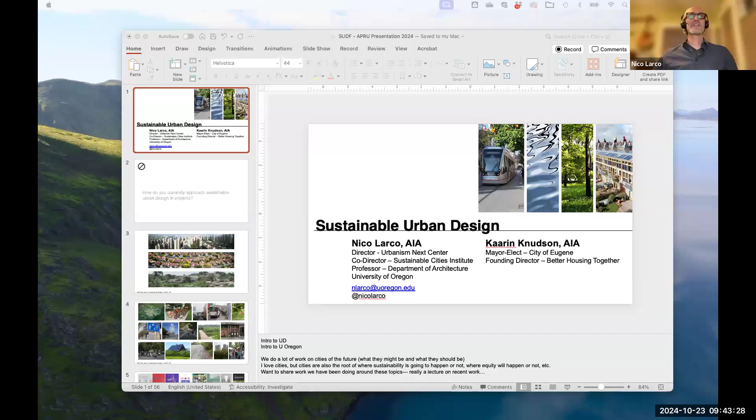Thank you so much, Paola. I can't even tell you how happy it makes me to hear that you're using this and that it's helpful to the work you're doing, after 10 years of working on this project. It is very exciting to see that it's useful to people. I'm thrilled, absolutely thrilled. And thank you, Kaarin, for the introduction as well, and for the invitation to be here. We're both very excited to share a little bit of the thinking and the work we've been doing on the Sustainable Urban Design Framework and Handbook.

As mentioned, I'm Nico Larco. I'm the director of the Urbanism Next Center, co-director of SCI, and professor here in the Department of Architecture. And Kaarin is here as well—Kaarin, do you want to introduce yourself? Hi everyone, I will say more in a few moments, but also an architect and urban designer in practice for the past 20 years, and had the great fortune of working together on this research project with Nico for much of this past decade.

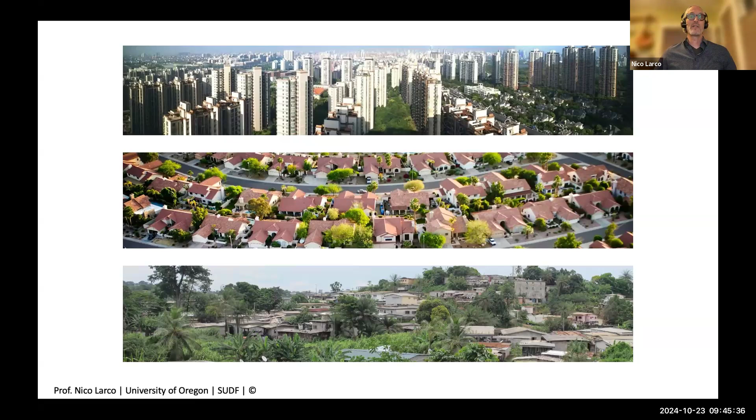One thing that's absolutely clear is that there's tremendously different contexts out there. These are images: the top one is Shanghai, the middle one is Arizona, and the bottom one is Libreville in Gabon. What's absolutely clear is that these all have really different conditions, very different demands. Climatically they're very different, culturally they're different. Politically, economically, there's a whole range of differences in what would make sustainability possible in one place or another, or what interest there might be in sustainability, and how to do it.

So it's really important for us to know what we should be focusing on. How do we compare and evaluate different schemes, for instance, or different areas? And how do we make sure we shed light on false claims? There's a lot of greenwashing that happens around here.

Turns out there's a ton of fantastic work in sustainability-related areas in urban design. What you notice at the outset is that it spans a lot of different disciplines that often have fantastic work, but also very siloed work—everything from transportation pieces to urban ecology, urban forestry, stormwater networks, how we understand parking, just a whole range of different pieces.

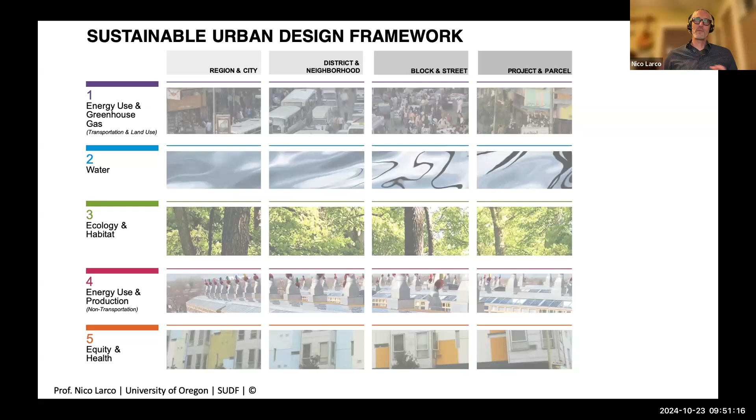But if you do this, you get a sense of overall this kind of matrix of outcome goals and scales we work on. And what we did here is then add specific urban design elements, physical things that you can do in the city that exist within these outcome goals and within these scales.

And Paola, that link I sent you, if you can put that in the chat, that will take you to a page which has, I think the first link there is the framework. So you can have a copy of this framework to help understand what we're doing here.

So what this does here, as I mentioned, these are all specific physical things that you can do in urban design. What this does is it lets you think about, for instance, I've got a project at this scale, these are all the questions that I should be asking about this project, right? In all these different areas, and thinking about how they might relate to each other, what trade-off there might be.

Or such. You can also think about, if I'm doing a project at this scale, doing an evaluation of what's happening at these other scales to figure out what things you might be able to work off of, you might need to mitigate, you might need to work with different stakeholders or different partners to help work on those things.

You can also use this to help understand if you want this outcome, if you really want to deal with stormwater issues, for instance, these are all the things that need to happen in the physical realm over all these scales to make that actually work.

So I often say this is like a magic decoder ring, this framework. So if you know, and typically, your clients, your community stakeholders, they understand what they want to get out of this, this helps them understand and helps you understand what physical things need to happen to get to that. So it's a way to help affect your design decisions, understand what kinds of things you need to take care of, and also help you understand or engage stakeholders around this.

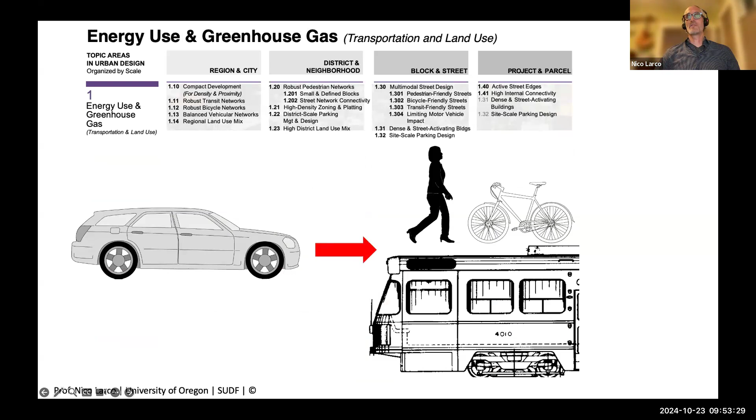So for energy use and greenhouse gas for transportation and land use, as I mentioned, this is really about how you get people out of cars and into bike, pedestrian, and transit options, which are much more sustainable, much more equitable modes, less energy intensive for what we're talking about in this category.

So at the highest scale, at the region and city scale, we're talking about things like compact development, making sure that you're building densely and not having a large metropolitan footprint.

So compact development is an important thing to be considering. I think Kaarin might be talking a little bit more about that later on.

Other things to think about at this scale are overall transit network. So our regional transit network, how does transit work all the way across this area? Our bicycle network - so these aren't necessarily what's happening on the street, but how the whole network works. And things like regional land use mix.

So understanding, thinking about ensuring that we don't have, for instance, all of residences in one part of our city, all of our businesses, all of our commerce in another part, and all of our industry in another part of the city, but making sure that that's mixed at a regional scale.

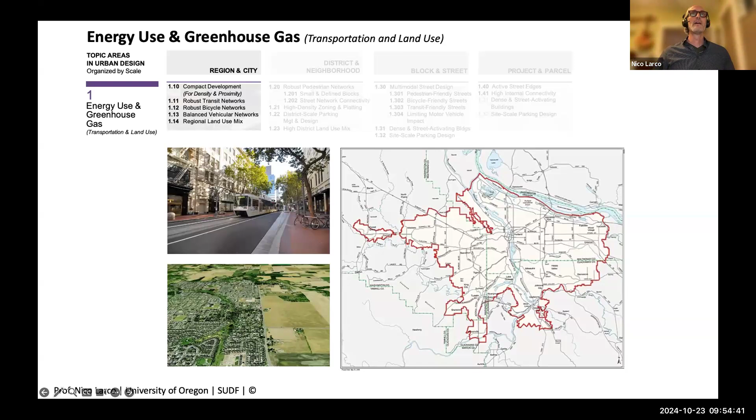At the district and neighborhood scale, there's a whole other set of things that we think about. So one of the big ones is this question of having a robust pedestrian network, making sure that you can easily walk from one place to another that has really good connectivity.

But in these kind of gridded developments, it's very easy to get from one place to another, right? If you're going from one place to another through a fairly straight line, from one place to another.

Which doubles or triples the distance that you would have to walk. So not having very good street connectivity creates increased distances, which leads us to do the obvious thing, which is you typically tell your child to get in the car and I'll take you there. So having more network connectivity helps us make a more pedestrian friendly area.

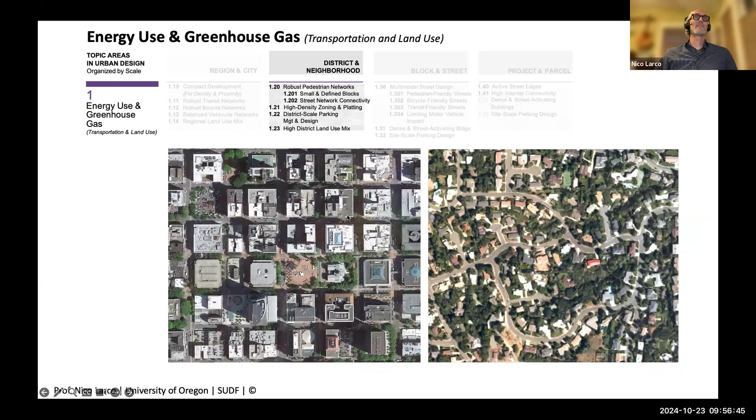Also at this scale, we're thinking about high district land use mix. So for instance, having what's often considered the 15 or 20 minute city, that in one area, instead of having single use where we see all that happening over here, we have a range of different uses that are all right next to each other, which makes walking and biking feasible within that distance.

At the block and street scale, we're really talking about what's called complete streets or multimodal street design. This is an image from NACTO. If you're not familiar with the Urban Street Design Guide, it is a fantastic resource from NACTO.

Their whole series of street design guides are fantastic. We worked with them on this research early on.

This shows a street that has, at the block and street scale, design that allows all the different uses. It has ample space and great amenities for pedestrians, for cyclists, designated lanes for transit, and it also allows the car, but it doesn't allow the car to dominate. So making sure that the streets allow all these different uses.

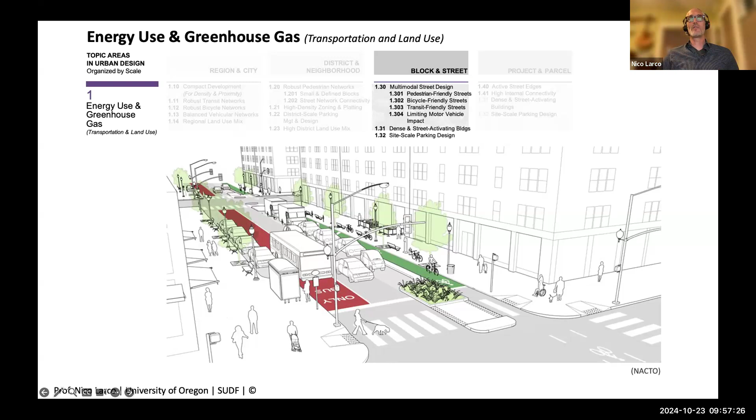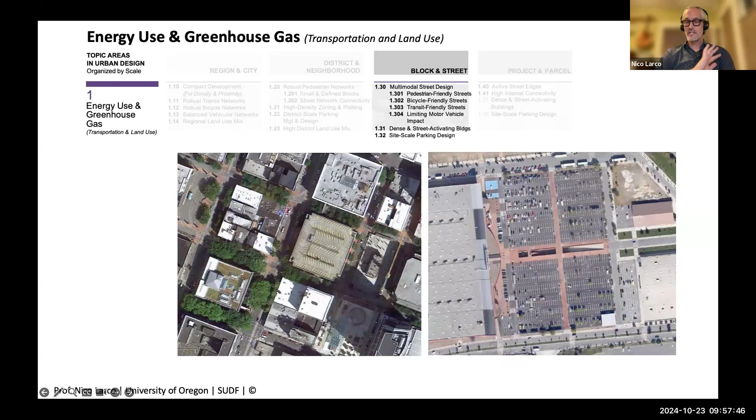You can also think about how we design parking at this scale, at the block and street scale. So where is it located within the block? Is it on the corner or within the block? What's the edge condition like? How are you making sure that it's not creating these big voids within the city, but instead creating a continuous street front that feels safe for pedestrians?

And then finally, at the project and parcel scale, we're really talking about how it is that the building is interacting with the urban design, how the building is helping create activity at the urban design scale.

So for example, this image on the left is high density housing. This is very much the Vancouver model of a perimeter block. Instead of having all this housing just open, accessed from behind, typically we'll see projects that have one entrance, everyone comes in, there's a corridor in the back, and everyone's served from there. Instead of that, this actually has entrances happening from the street. So consider the difference in the activity that this feels like, even though there's no one here on the street, just how it feels to be on the street when you have transparency and direct entrances happening from there.

Similarly, as opposed to if this was all the back of these units. On the commercial street, you can think about the amount of transparency that exists here, the amount of openings that exist here, all happening on the building side, but really affecting the urban design. As an example, imagine if this was a continuous brick wall here, and how even with everything else designed exactly the same, that continuous brick wall would make it feel not like a friendly pedestrian space.

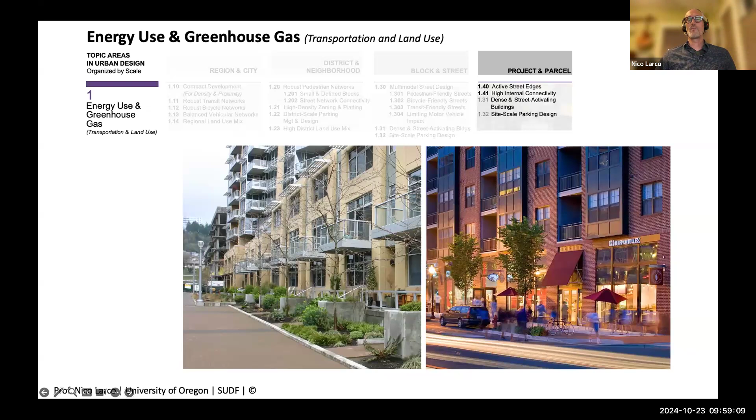So these are all the different things that we can be doing at these different scales to help get to this outcome of more bike, pedestrian, and transit use, and less energy use and greenhouse gas production.

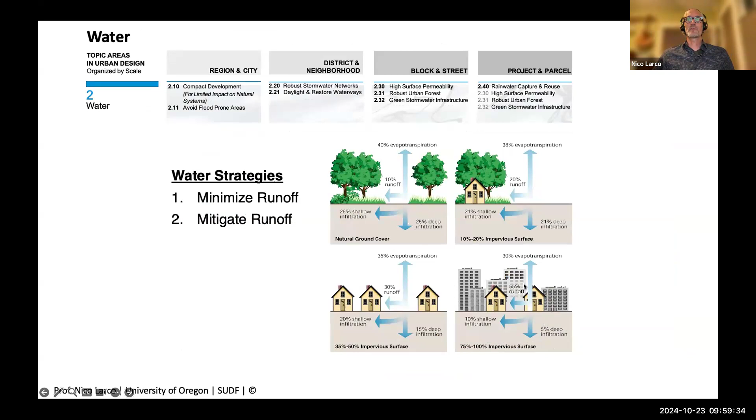In terms of stormwater, there's two things we want to do. One is minimize runoff, and the other is mitigate runoff. The more impervious surface we have, the more runoff occurs. In a natural condition, only 10% runs off, with 25% deep infiltration. As we get more impervious surface, that changes to 5% deep infiltration, more than 5 times the amount of runoff. So this is really an enormous problem in urban areas.

As I mentioned, the strategies are one, to minimize that runoff, and two, to mitigate the runoff. In terms of minimizing it, it's things like compact development. Here's a watershed, and instead of having development equally spread across the entire watershed, if we concentrate it in one area, that area might have more problems with runoff, but you leave most of the watershed untouched, which is a much better overall condition.

We can also think about minimizing impervious surfaces, making streets less wide, using permeable paving, those types of things. And we can also think about the block and street scale and the project parcel scale, thinking about how we use trees.

Here you can see an image of a street after rainfall, and a lot of the moisture has actually been caught in the tree canopy, in the leaves, and in the bark. So depending on what kind of trees you're using, it can actually keep a lot of the moisture from ever touching the ground and becoming runoff.

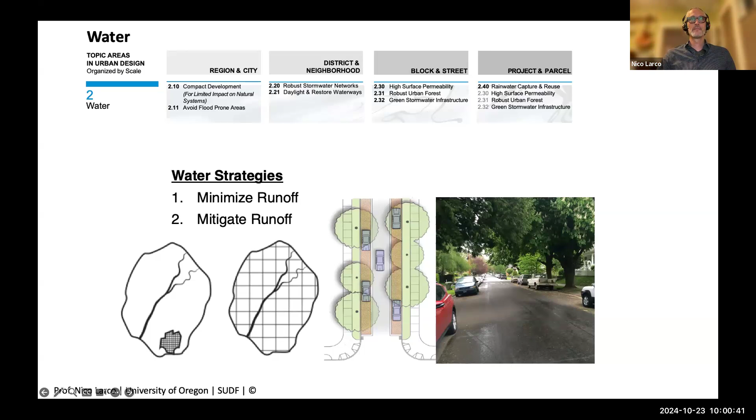In terms of mitigating the runoff, once we do have water that hits the ground and is moving horizontally, instead of putting it into a pipe, we can think about a much more sustainable action, which is trying to cool it off, slow it down, filter it, and put it into natural systems.

So this is a whole series of green stormwater infrastructure, which you can see at the block and street scale, that tie together to be a robust stormwater network at the district and neighborhood scale. You have detention ponds, retention ponds, rain gardens, bioswales, these types of things that all tie together to move water and let it at all times cool off, move slowly, infiltrate where it is, get filtered, and be part of the natural water cycle again.

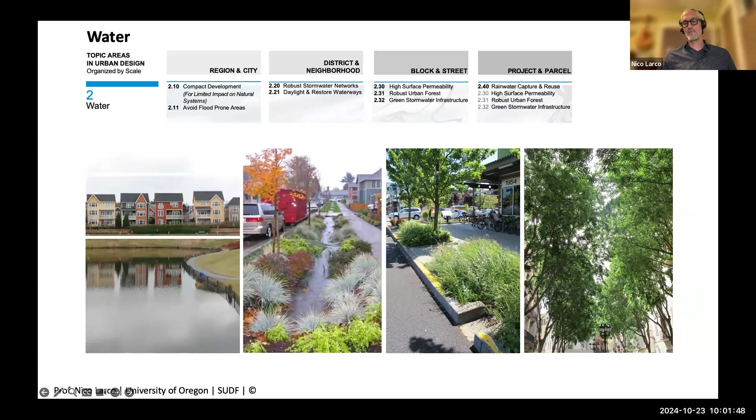You also have things such as trees at the block, street, and project parcel scale, which allow something called evapotranspiration. That is, they're pulling water out of the soil through their roots up into their canopy and then evaporating that water out into the environment. This is a great way to get water out of the soil and give it more capacity to have additional water in. So these are all ways of dealing with reducing the amount of runoff and then mitigating that runoff.

In terms of ecology and habitat, there's a couple things we want to do. On the one hand, just don't touch things you shouldn't touch. So from the region and city scale, really avoiding ecologically sensitive areas, figuring out where you have critical habitat and trying not to touch those things, and then figuring out how you mitigate where you do touch it.

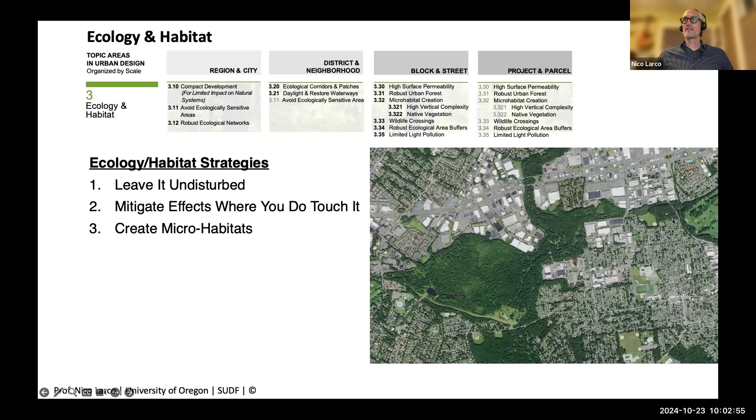As you look at these things and think about these robust networks, you can think about where infrastructure crosses these networks and how that's dealt with, here at the block and street scale. We can think about things like wildlife crossings. Here's an example: these are simply culverts that have been modified slightly to become more accessible to different species.

For instance, this one is for turtles specifically in Maine. This is for larger wildlife. And then you have these more expensive examples, but also tremendously effective. This is crossing a freeway, and so there's a land bridge that crosses here. This is in Texas, which lets species easily move back and forth within a natural habitat and not feel that barrier.

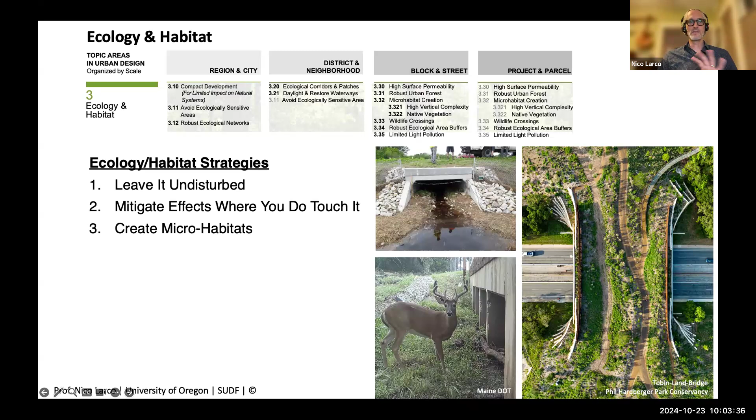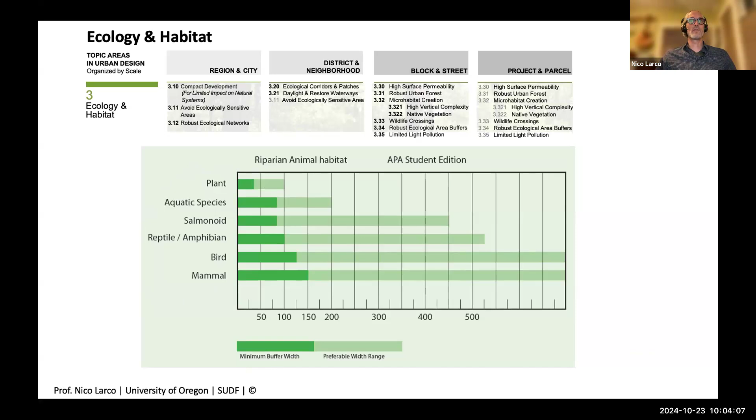So you can have those consistent connections across. You can think about different types of habitat, core habitat, edge habitat, and how you buffer between habitat and development. This slide shows what your target species might be, right? So here we're talking about robust ecological area buffers at the block and street scale, what type of species you're most interested in, and what size of buffer you would need to help protect that species. That might change depending on the intensity of development around it, or if there's a large slope, or water movement between the spaces, things like that.

We can also think about this - this came out of interviews with urban ecologists, asking them what is it that urban designers should know. One of the things that came back is this idea, at the block and street scale, of high vertical complexity. If we think about how we typically do urban areas, we do this monoculture of grass or lawn, and this monoculture of trees - I call these lollipop trees - that exist within that. This is a not very robust ecological setup, right? It has the same culture, same species all the way through, and it does not create a range of different structures for species to thrive in.

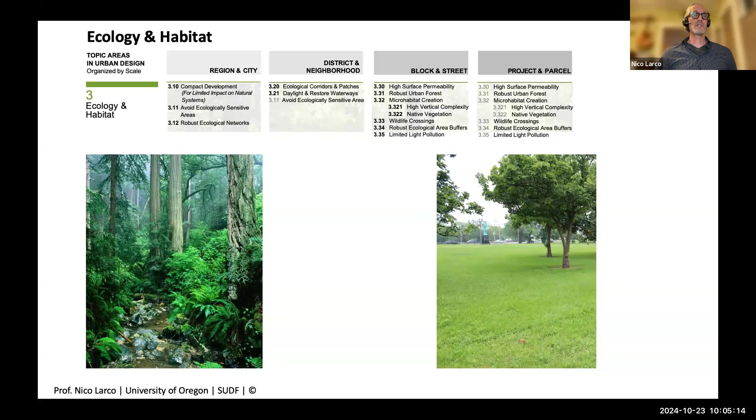So this is what the Pacific Northwest looks like - you all should come and visit, it's beautiful. But what you see here is the canopy structure. You see smaller trees, bushes, sedges, ground cover, all creating a really complicated vertical structure that allows for a range of different habitat types, helping different species and also the same species at different points in their life cycle. We can do this in urban areas, things like this.

So this is simply a bioswale that's collecting water coming off of a parking lot. Instead of simply going into a pipe, there's a swale that helps protect that. And instead of that swale simply having lawn, there's this complex structure here of sedges and grasses, taller trees, smaller trees, which are fantastic for creating habitat in the city, specifically for insects.

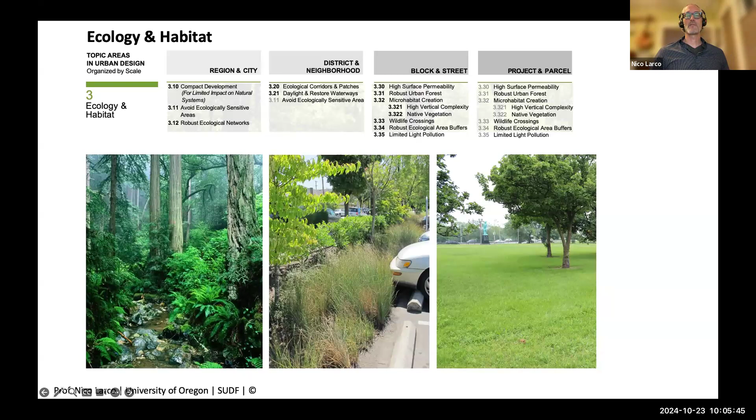You can also create microhabitat. This is a park that has wetlands, grasslands, and oak savanna all in the same space within one area. So really a range of different ways that we can protect habitat, make sure we don't touch it where we shouldn't touch it, and then also create microhabitat.

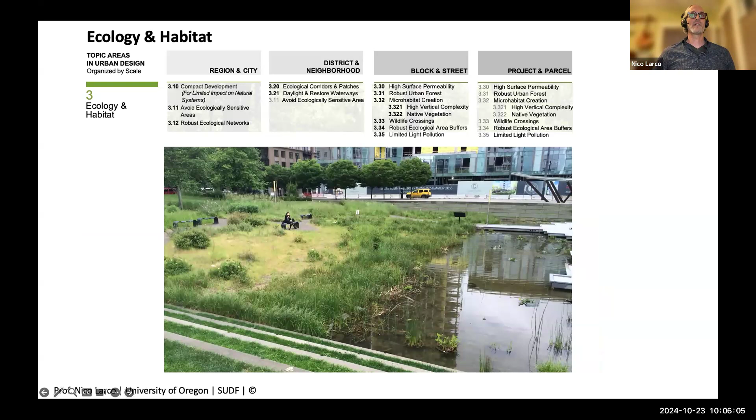In terms of energy use and production, again, this is how we create the opportunity for sustainability in architecture, but then also think about how we are dealing with embodied energy and with the urban heat island effect. One of the issues when you think about energy use and production is that there are very different climates, which I'm sure you're all familiar with. In the work we've done, we've divided into arid, tropical, temperate, and subarctic.

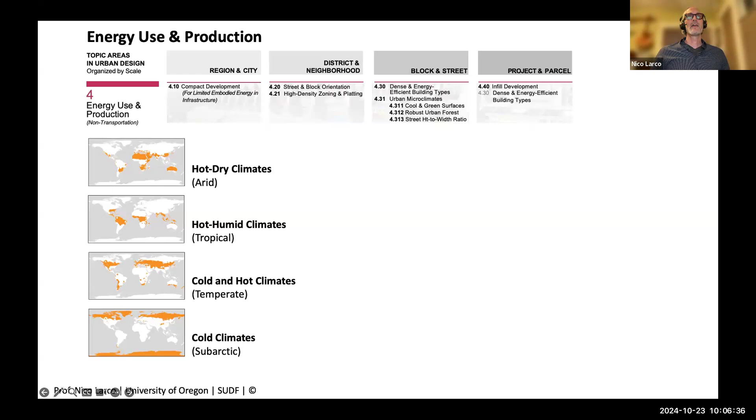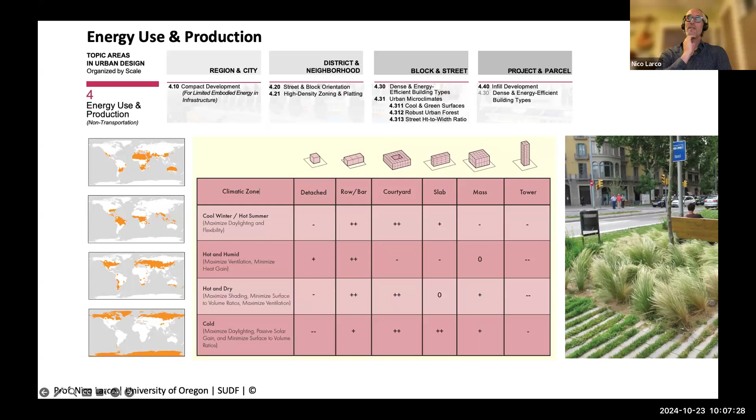We also have, in block and street, thinking about cool and green surfaces. This is a beautiful example in Barcelona, in the Ramblas, not the famous one, but another one that exists in Barcelona, where they've actually used greening of the infrastructure to help cool the entire city down. A really nice example of that.

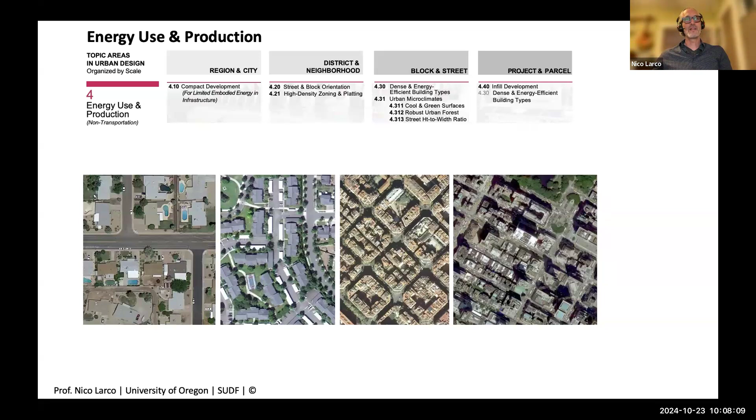We can also think about embodied energy within urban areas. If you look at these four examples, getting denser as you go to the right, think about the amount of urban infrastructure - streets, sewer, water lines, electrical lines - that you need. In this example in Florida, this amount serves 1 unit, where that same amount here serves 50 units. So the amount of energy we're using in the built environment is completely different in these two, just based on urban form. Much denser development makes much better use of the overall materials and reduces the energy use for those things.

Okay, last one here: equity and health. These are, as I mentioned before, five key areas that help us understand how the built environment creates a more equitable and healthy area.

These are issues like affordability - thinking about a better transportation system that lets you bike, walk, or use transit, which is much more affordable than using your car. But also thinking about the range of unit types you might have in an area, which typically lowers the overall cost of housing. Then there's overall accessibility, which has a lot to do with the transportation network we talked about.

Physical activity involves two things: how we move around, thinking about our transportation system and having more active modes, and also where we spend time exercising or moving our bodies. One key indicator of whether you'll exercise today is how close and easy it is for you to get to a place to do that. So we think about the location of our parks and making them active and attractive so different demographics - kids, young children, teenagers, young adults, and the elderly - have the facilities they need to make that work.

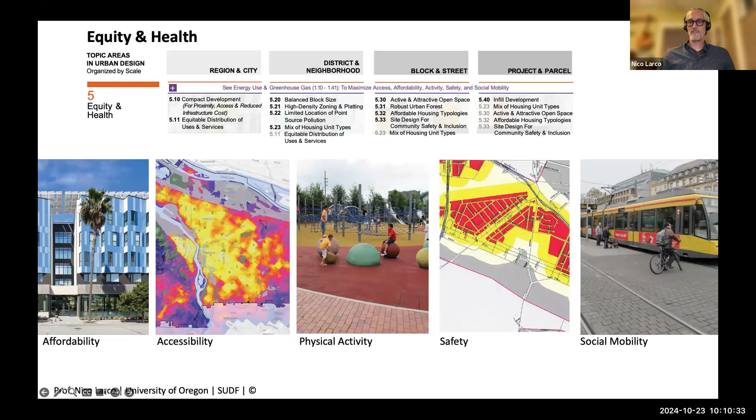In terms of social mobility, there's a ton of things within the built environment that help make your ability to get yourself out of poverty work better. So having affordability, more accessibility, the ease of getting to and from a job, the ease of taking my kid to the doctor - all those things help improve your overall socioeconomic opportunities.

So that was a lot to go through. I appreciate you hanging in with that.

Just to quickly talk about how we might use this - if you look at the overall framework, you can think about an outcome you want, and then understand these are all the physical things you need to do to get to that outcome. You can also think about the project scale you're working on, and these are all the questions you need to be asking and understanding how they relate to each other. This also helps you understand how there might be synergies or co-benefits.

For instance, thinking about the tree location on this street, or decisions about what trees and where to put them, you can think about them in terms of how it helps with your mode choice and how it helps you decide to walk or bike.

So putting trees that protect you from the cars, for instance, or create a nice shaded environment. You can think about in stormwater, what types of trees you have, what kind of canopy they have, and how they hold water or evapotranspirate water.

In terms of ecology and habitat, you can think about if you want to use the same tree everywhere, which we tend to do a lot in urban design, I think is becoming less favorable, or if we really want to change the species as we go through, or add not only trees but also smaller trees or bushes that create better vertical complexity.

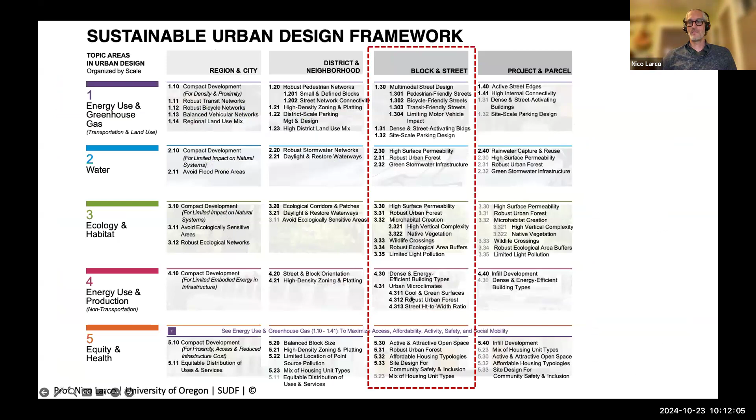In terms of energy use and production, we might think about do we put the trees on the north side, the south side, the east side, the west side? How does it shade? How does it help create lower temperatures?

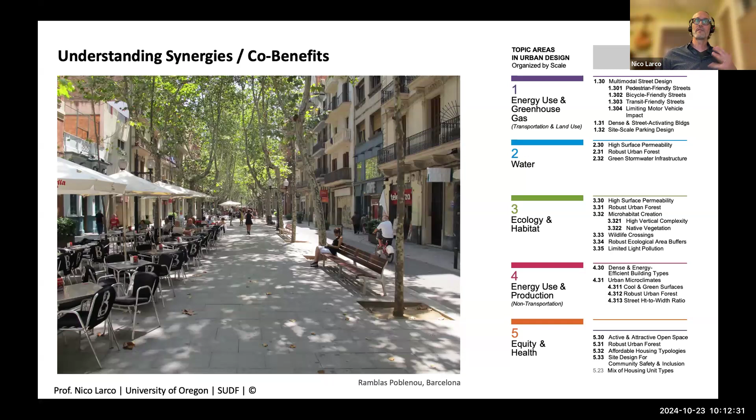And in terms of equity and health, we might actually think of what species of trees we use and making sure that it doesn't have allergens. So instead of having what we typically have as a fairly simple decision, where I'm simply going to use a tree that we used a block over, we can make much more sophisticated decisions. I'm going to skip through this in the interest of time.

So there's all these different ways to use the framework, thinking about it as a design tool, looking at existing conditions or to evaluate different schemes. We can look at a scheme and think about how it functions or performs in each of these areas. We can think about it for client and stakeholder engagement, and also in design team composition. So both at school or professionally, do we have people who understand all these different areas so that we can have a good basis for design?

So the framework itself, with all these different pieces, is actually something we've been working on for the last 10 years, Kaarin and I, in putting together the Sustainable Urban Design Handbook, which is the book that Paola just showed you.

And just to show you a little bit of how it's organized, this is an example of one of the chapters. Each element in the framework has its own chapter, and each chapter is organized like this. It has what we call a dashboard page, which tells you a little bit about the topic itself. This is the robust ecological area buffers. For those who don't know what it is, there's a paragraph that helps describe that.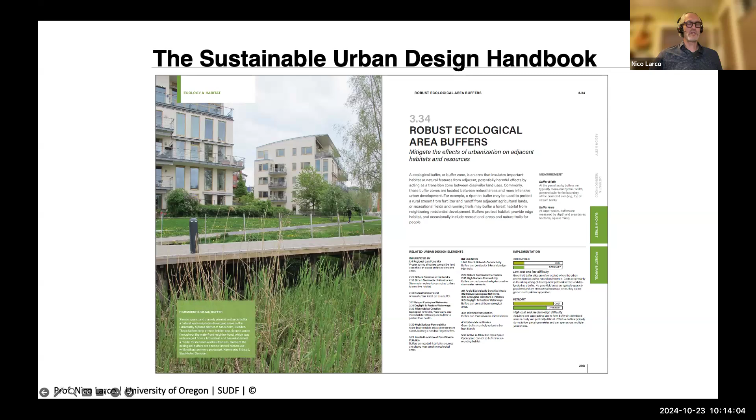We talk about metrics. We talk about related urban design elements, so what is it that this element influences and what it's influenced by, so you start to understand the connections across these things. Implementation, so how it works in greenfield and retrofit situations in terms of cost and difficulty, pretty much how expensive it is and what is the political capital involved.

A section on the recommended approach, so you get a sense of what you're trying to do. Typical approach, this is what we often do when we build, which is often not the recommended approach. We have a section on importance, which really looks mostly at peer-reviewed research and also some professional best practices.

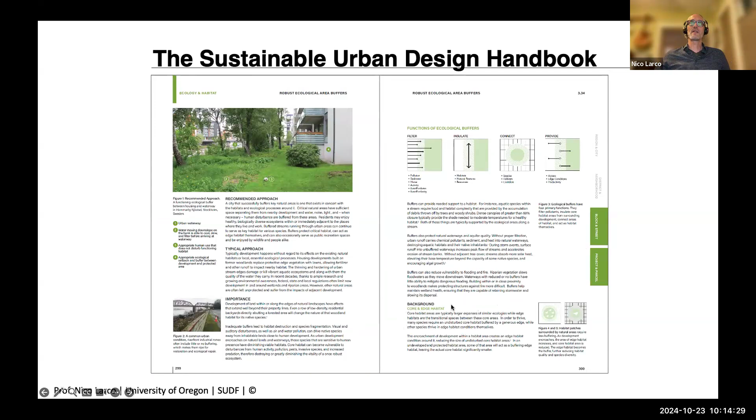Each element chapter also has a background section, which gives you more background on the topic, for instance, where to buffer or some characteristics of buffers that are important. And then we have a section on consideration and caveats, which is meant to give you a little bit more nuance on the types of things you should be understanding about this.

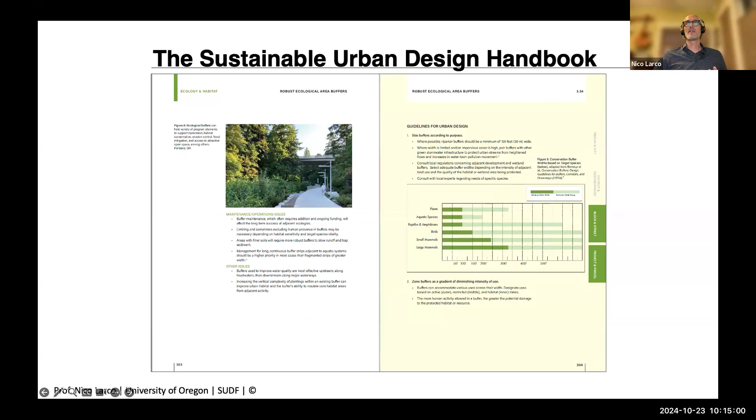So element interactions, political issues, maintenance and operations issues, and then other issues you can think about. And then finally, we have guidelines for urban design. These are basic rules of thumb that you can follow to help make good urban design decisions at the schematic design phase. So this gives you a sense of the kinds of things that are in here.

There's been a fantastic group of people who've helped put this together, students, professors, and professionals, who are listed here and also in the book. And with that, maybe I will pass it on over to Kaarin.

Thank you, Nico. And I think if you stop sharing, I will be able to share. Let's see here.

Hopefully that is looking okay for everyone. Nico, thank you for reviewing all of that information. I now will drill down a little bit into this work, and share some ways that this is directly applicable to the work that you all are doing as designers, as professionals and educators, and also how this work connects to the general public.

On the very first page of this book, the dedication has to do with expressing gratitude to all of the people engaging with the work to create a sustainable future with urgency and optimism. I presume that's why you all are here this evening, because you are looking for tools and connections and community that can assist you in engaging an incredibly complex crisis, but also because you feel a responsibility and a delight in the work of building community and building the environment within which we all live.

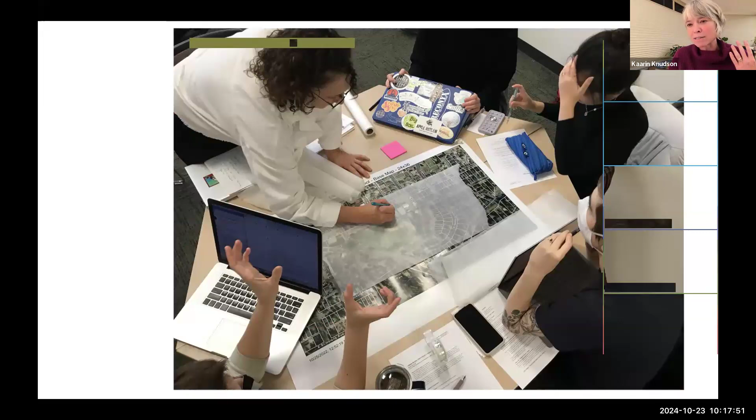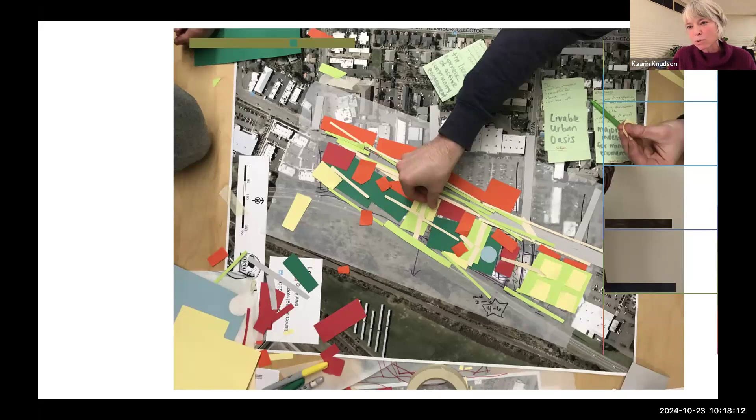How do we know that what we're doing is actually going to help? How do we know that the way we're organizing all these interrelated elements is actually going to move the needle and improve the condition on this planet and in our communities, for current and future generations? That was incredibly motivating to see the ways students understand all these different relevant issues. I think it's bold, but also optimistic, to think we could assemble a resource and a tool in this handbook that would help people do this work.

So as Nico mentioned, and I won't review all of these in detail, what we're really looking for are some key shifts in terms of urban design outcomes.

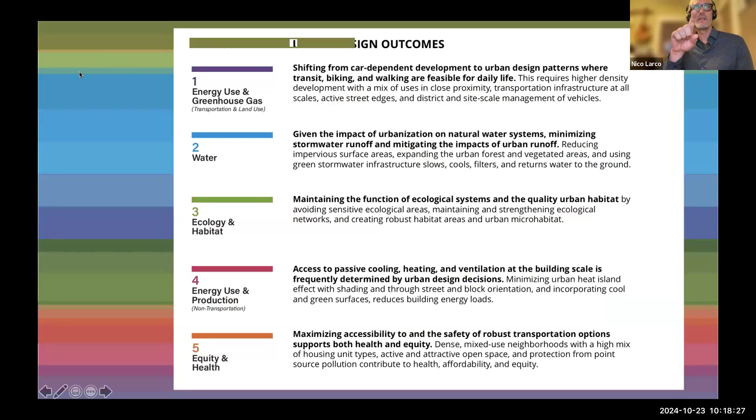Kaarin, sorry to interrupt you. I think some of the things on your window are blocking the slides, so if you could move those out of the way. There you go, that's better. Did that work? Yeah, that worked. Okay, sorry about that, I think that's the toolbar at the top of my screen. Thanks for letting me know. Sorry Nico, to interrupt. Nope, you're totally fine.

Just as a reminder, we really are looking to change the outcomes and the ways in which we assemble all these different elements within our cities. We're seeking to deliver more integrated outcomes and shift from patterns of development that are very fossil fuel intensive and emit enormous pollution, towards patterns that allow people to use active modes of transportation and not rely on individual vehicles to access their daily needs. We want our urban environments to protect natural water systems, minimize the impacts of urbanization, and maintain the ecological functionality of the environments we live in. This is possible through the care with which we deploy these different elements.

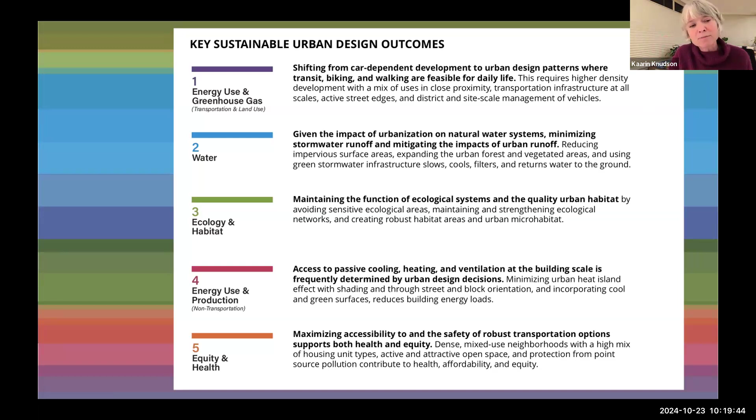Lastly, as Nico mentioned, we're making sure we're not leaving all the work of passive design to the building scale, but thinking about how urban environment and urban design decisions set the stage for passive cooling, passive heating, and passive ventilation at the building scale, as well as the health and comfort of the surrounding public realm. And lastly, as we're thinking about a transforming climate and the inequities that persist across communities, we are truly developing urban networks and systems that expand access to opportunity and the equity of opportunity that exists within cities.

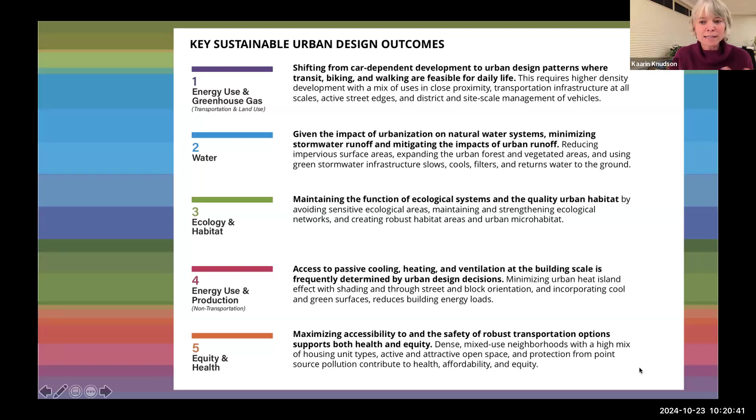That means, of course, robust transportation networks that serve people and support their lifelong health, but also that we're thinking about the density and diversity of the neighborhoods we're designing, and the access to affordable and appropriate housing within those areas, and that we're really minimizing the existence of point source pollution within any community.

As Nico and I have been talking with people about this project over the last several years, and certainly as the book has become an accessible resource for folks, what feels very apparent is that everything Nico just shared, and the work of people engaged with sustainable urban design, often feels overwhelming. There's an enormous number of levers, an enormous number of ways in which we might affect sustainable outcomes, but for us as designers, practitioners and educators, being able to chart a path through that overwhelming response is a core competency and a core responsibility of this work.

So as mentioned, we have these 51 different elements deployed across 4 different scales of opportunity, with each project existing at a particular scale, and 5 different topics that allow us to make measurable progress.

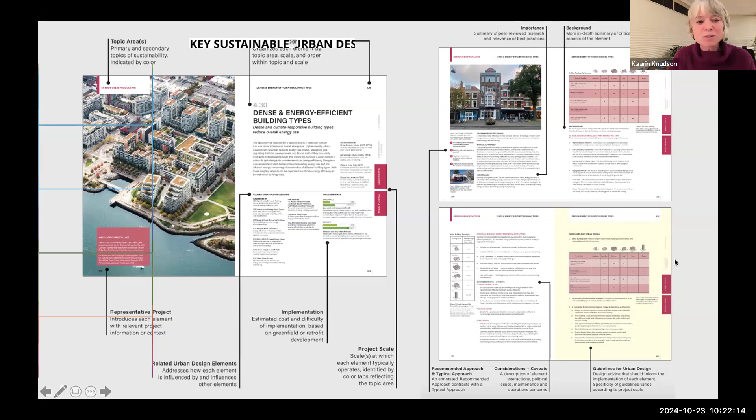As we thought about this book and how to organize all this information, Nico just walked through this very quickly with a chapter example, but this is a snapshot from within the book. It was incredibly important to us as designers that this information be visually accessible, and that we did as much as we could through the process of actually presenting and curating this information to people, so that something that seems overwhelming, or where the complexity might be too great to undertake with any particular project, would be supported by how we designed this book.

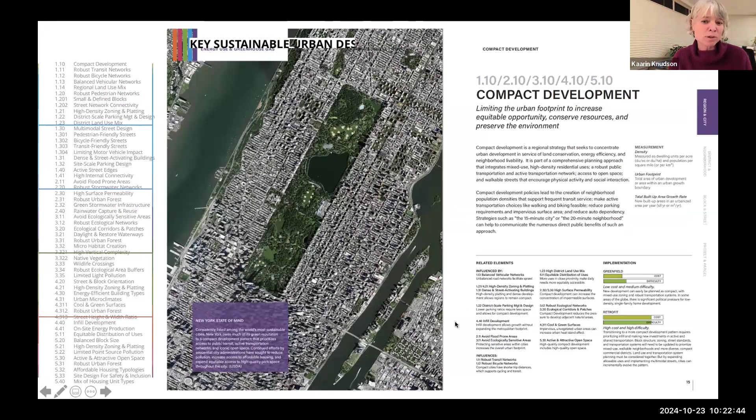As you dig into this book and think about its potential, that was really a centering motivation as we thought about each chapter and how to lay out what's important to understand about compact development, for example, and the ways our cities are basically organized. Presenting that with an overarching summary and an understanding of metrics and of the ease with which it's accessible or can be achieved was foundational to that work.

But within each chapter of this book, we also dive into the research and details that support an understanding of the importance of these different sustainable urban design elements.

So for example, understanding compact development in comparison to sprawl, and capturing and adapting research from Todd Litman at the Victoria Transport Policy Institute, to help convey the very clear impacts of sprawl and how it differs from compact development in a visual sense. We have increased per capita land development, which makes it very difficult to maintain natural spaces and functional ecological systems uninfluenced by urbanism, and also reduces our access to agriculture.

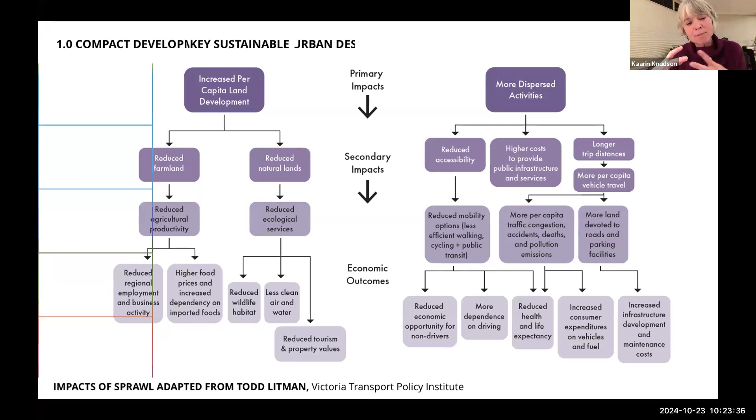A second path of concern is that as we sprawl, rather than developing in a more compact manner, every activity we need to access in daily life becomes more dispersed. There's a greater distance between destinations, which reduces accessibility, puts a higher cost on public infrastructure and services, and reduces the time people have in their everyday life because it takes so much longer to get from place to place. In each chapter, with information like that, we try to present this content in very straightforward ways.

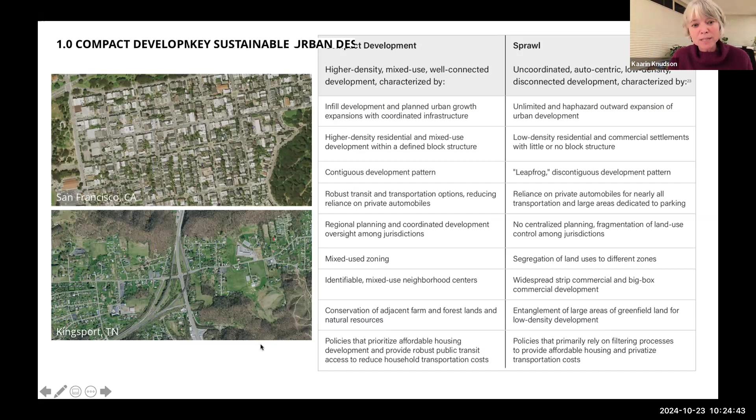So simple comparisons of compact development as a higher density, mixed use, well-connected development pattern can be understood in narrative but also in graphic representation, with examples such as San Francisco, in comparison to a sprawling development pattern that's uncoordinated, autocentric, low density, and disconnected. It's characterized in a number of ways, specifically the segregation of land uses in a very disconnected pattern across a very large area. We can also see that in comparisons like this example from Kingsport, Tennessee, which is one of the most sprawling urbanized areas within the continental United States.

Also important to understand is that if the goal of compact development relates to reducing energy use and greenhouse gas emissions, that delivers all the way down to the block scale and the parcel scale.

As we think about compact development patterns, we're also thinking about the quality of that development pattern in a very specific way. We know from research that active street edges support people's decision to walk, and to walk longer distances, or to use transit, or to ride a bicycle through urban places. Helping designers, practitioners and educators understand what the components of active street edges are, and how those could be deployed in any number of ways, was incredibly important.

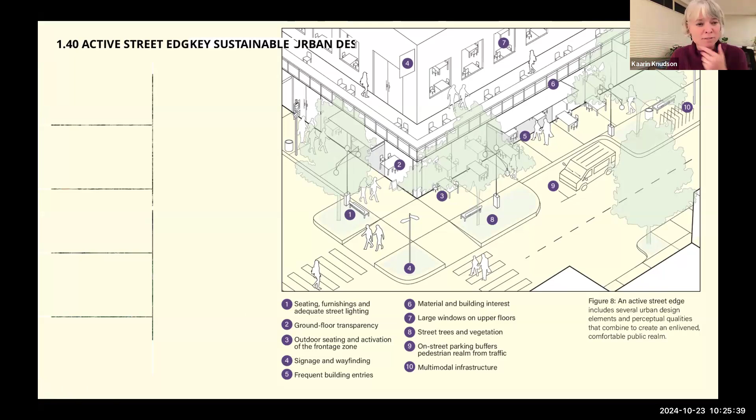So this is another of those snapshots from the guidelines that accompany every one of the 51 chapters within this book. The other big takeaway, which we often call co-benefits within sustainability and urban design, is really about interconnected concerns—helping communities see how decisions about the built environment can have multiple positive associations and outcomes, and why a development pattern prioritizing sustainable outcomes might be beneficial for communities.

Picking up on the example from Barcelona and the chapter on urban forest canopy, a robust urban forest canopy is one of the most influential elements of sustainable urban design. In our research, we found this element has influence across all 5 measurable topic areas and connects to numerous other elements because of all the positive benefits trees bring to urban areas. Presenting this chapter was one important step.

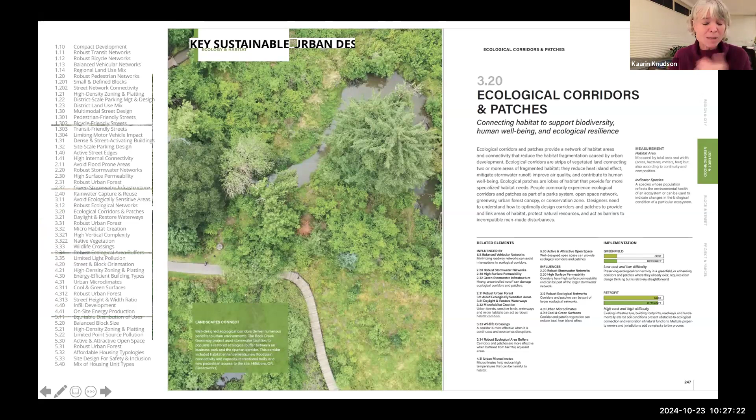But with this research, we're also hoping to help people understand how something like a robust urban forest canopy—an accessible, visible element of urban design that people feel attached to and delight in—connects to less familiar ideas. People may not be as connected to the idea of ecological corridors and patches, or understand how a robust urban forest can support ecological corridors and help create habitat-rich patches and functional ecologies.

They also may not be familiar with the components of ecological networks and how those relate to one another—including the core area, the buffer zone, landscape corridors, stepping stone corridors, and linear corridors—so our goal is to make this information visually accessible and to directly connect concepts like an ecological network to elements like beautiful trees along a boulevard someone walks past every day.

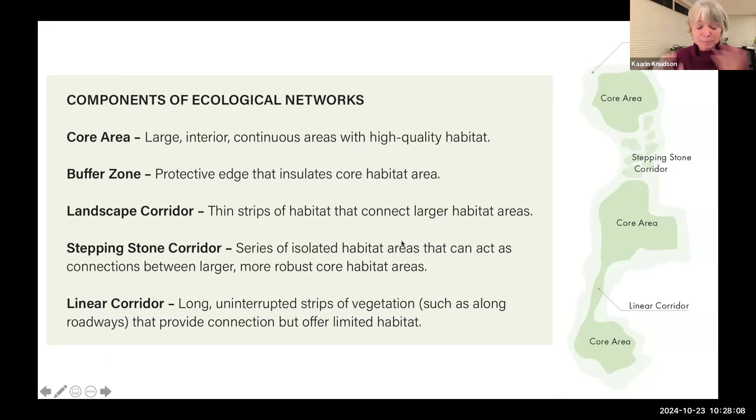This is really powerful and important work if we're trying to green cities and encourage more people toward environments and development patterns that prioritize these elements.

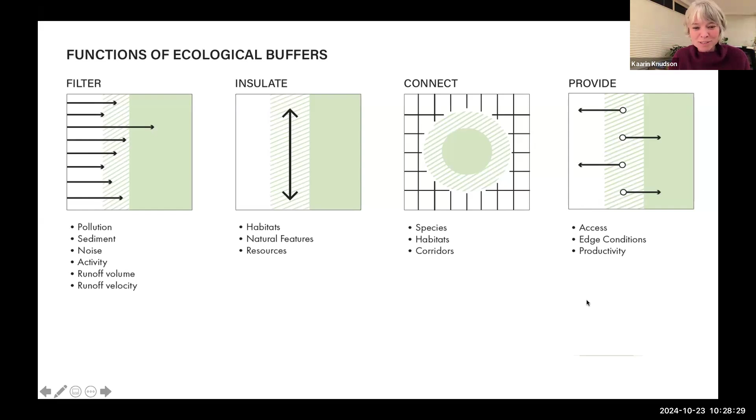Similarly, a third chapter connects directly to that element, dealing with ecological buffers and the ways they're designed to accomplish four different goals: to filter, insulate, connect, and provide habitat within urban areas. Again, that may not be what people are thinking about when they think of a robust urban forest and the trees they love along their street.

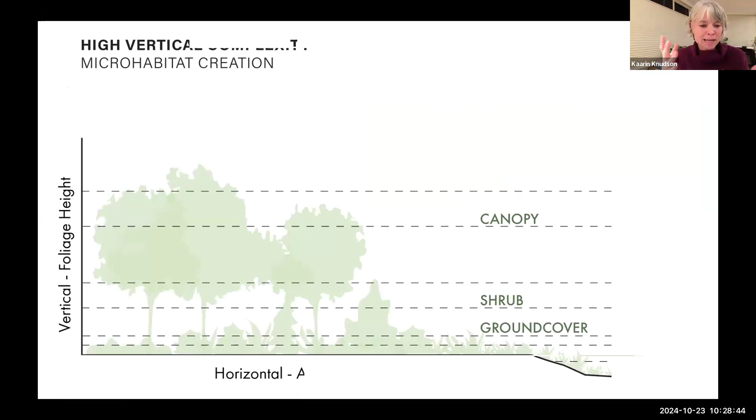And further, building on Nico's last example, there's a connection between how those street trees and landscaped elements are designed and how that design can deliver truly performative microhabitat in urban areas, contributing to the larger networks and systems I just described—presented in a way that's accessible to people and translates across different cityscapes and development patterns within cities.

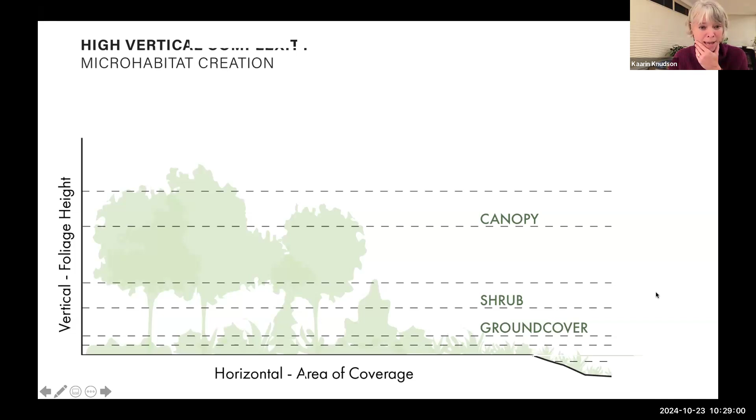And then finally, connecting—as all the elements within this book do, through the framework that Nico shared—the organization of this research ties elements like a robust urban forest canopy back to our goals around walkability and the design of pedestrian-friendly, multimodal streets, since trees also play an incredibly important role in creating and designing those spaces.

Trees require space and cannot be planned for after the fact, which is why it's so important for designers to carry that information forward. But it's also important for people who advocate for trees to understand that they can simultaneously be advocates for walkability and pedestrian-friendly spaces, achieving the same outcomes together.

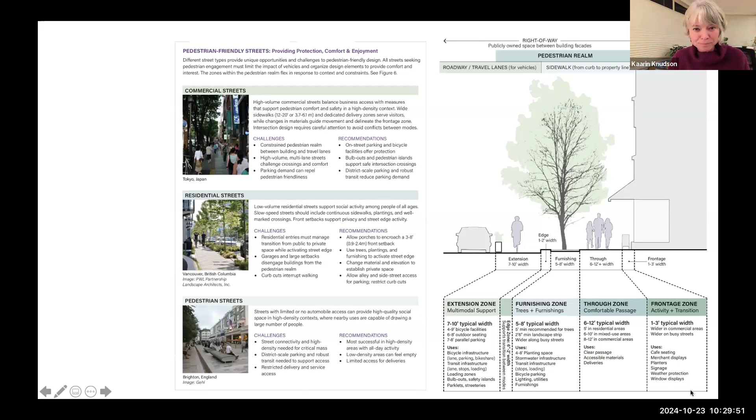This research also helps us navigate both understanding and making visible our values, while helping us overcome conflicts and navigate trade-offs and complicating factors that come with designing urban places where there's never enough room for everything we want to accomplish at once. In some of this work, I've partnered with community groups and organizations to understand how they might allocate resources toward specific infrastructure investments relative to the topic areas in the book and how we've organized these elements around those areas.

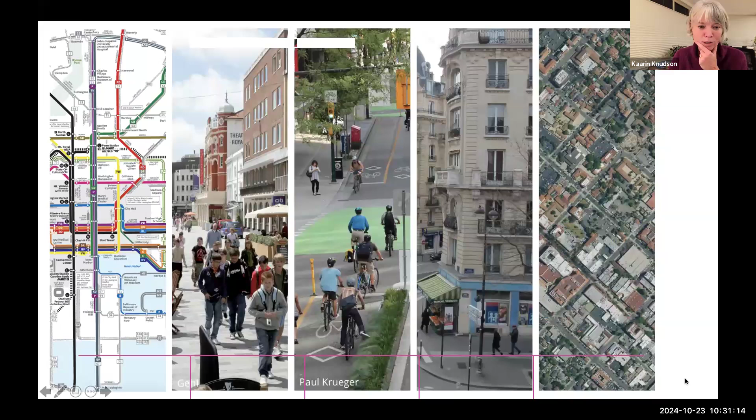Incredibly important, because oftentimes you will be talking with people about a particular plan or project, working with a community to understand a challenge or opportunity, and the ways different values translate into a sustainable urban design approach largely has to do with the practitioner's familiarity with how those elements translate into measurable outcomes. We're hoping to support that understanding with this work. The other final point is that cities are clients when you think about this type of work, and educators and practitioners have opportunities to link across all the networks and scales of sustainable outcomes if they know what's important.

As we're thinking about different patterns of development and ways in which transit networks, pedestrian networks, bicycle networks, dense street-activating building types, pedestrian connectivity through spaces, and a high degree of street connectivity connect to a place and project, when you as a practitioner or student engage from a particular point of entry, you have the capacity to stretch across all these different concerns and multiply the positive influence of your work. The same is true looking at natural systems and ecological networks within cities—we can translate from any scale of development to other scales if we know what's important and how to connect this work.

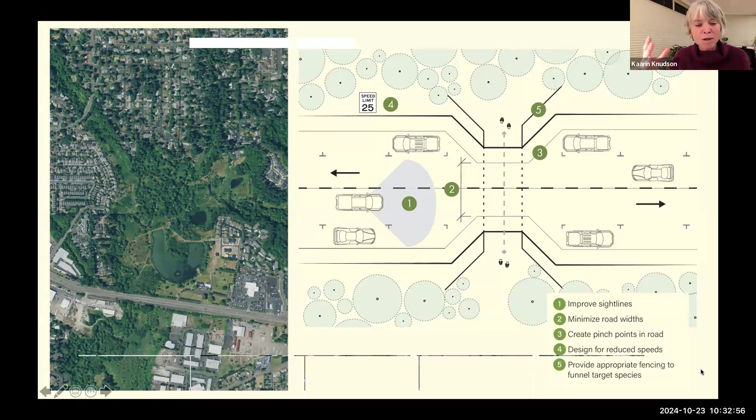As Nico alluded to, we can actually outline the process to navigate how we overcome conflicts—things like a highway or throughway across a piece of our ecological network within a city, and how we might design, in specific contexts, wildlife crossings and passages that allow larger habitat quality to be maintained and for movement to continue across this space.

We're hoping this resource is helpful to you in all these different ways, across all the project types and scales of work you find yourself engaging. It's the challenge of our time to integrate the knowledge we have and move from specialized knowledge in deep areas of study to information that allows each of us to be a well-informed generalist as we engage each project. We hope this handbook and research helps you do that. So with that, thank you, and I think we'll open it up to Q&A.

Thank you, Nico. Thank you, Kaarin. This was a beautiful presentation, I have to say. You went very deep into the structure of the book, which is really great for everyone to see. I think it really gives the idea of a tool, something useful on an operational level as well as on design and planning, which is exactly what I feel was missing in the literature, not only from an academic perspective but also from a practice perspective. So the output of your work is very welcome.